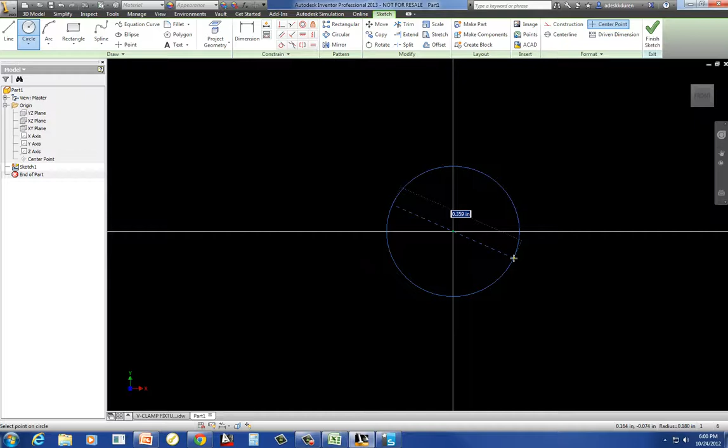I'm going to start out with my center protrusion. It's going to be circular, and it's going to have a diameter of what? 4. Ooh, that's a big one. Alright, and now I'm going to draw a rectangle.

Notice how I didn't project my geometry first, because when you're using a center point, you can go straight to that center point and draw that circular protrusion. But now I need to project my geometry, because now I need to make some things symmetric.

So I'm going to project the first 2 datum planes. Alright, I'm going to make them symmetric. Or do I need the dimensions? I'm going to put a dimension in here because I'm going to retrieve these dimensions. So I'm going to put it in here. It's going to be 1.

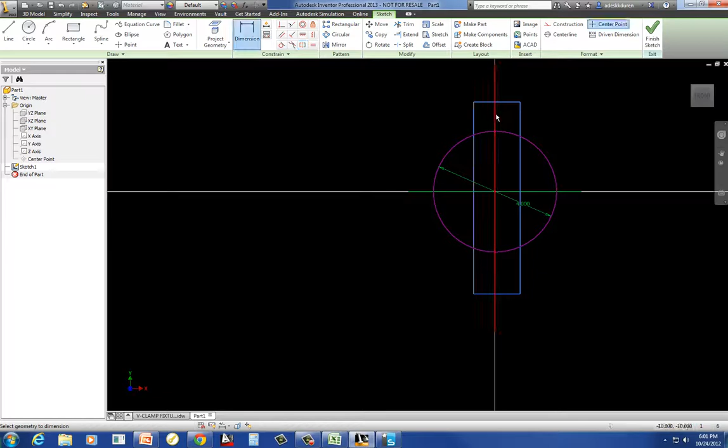So if I'm measuring from the center of this over to one side, measuring from one side to the other side, that's actually locating that. So on your drawing, this would be a 2x, wouldn't it? I'm going to locate this side from the center. I've got to go over here and do this one too. They're 2 different features. So now I'm going to put the overall dimension on here.

5.5. And this will be 2.75. Alright.

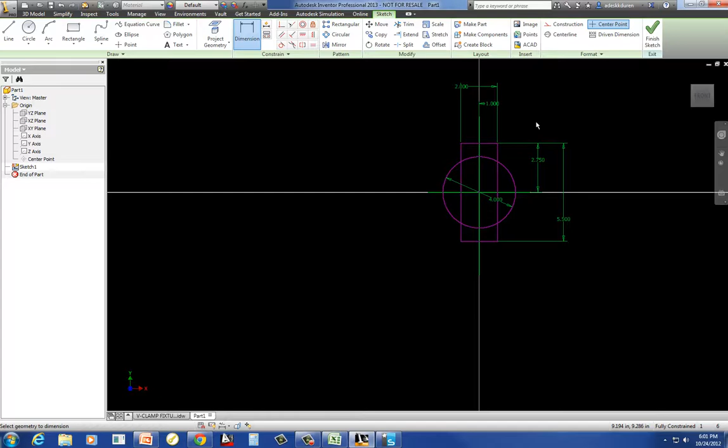Now I'm going to hit E for extrude. I don't know why it zoomed way in on me. That one, this one, and holding control to allow the other one too. And I'll always push my extrusions away from me.

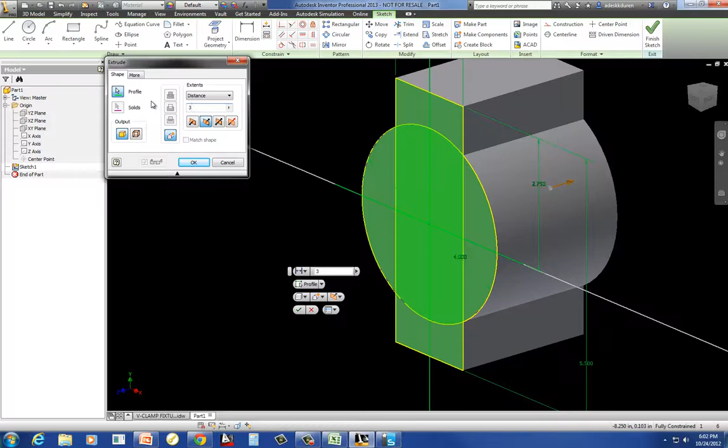Now, is there any reason for this to be symmetrically extruded? No, that hole is not on the center or anything. So let's go the whole 3 inches down. There's my first piece. The next one.

What do you guys want to do next? You're going to put that hole in there? We would need a hole for a circular pattern. So I would highly recommend a hole next.

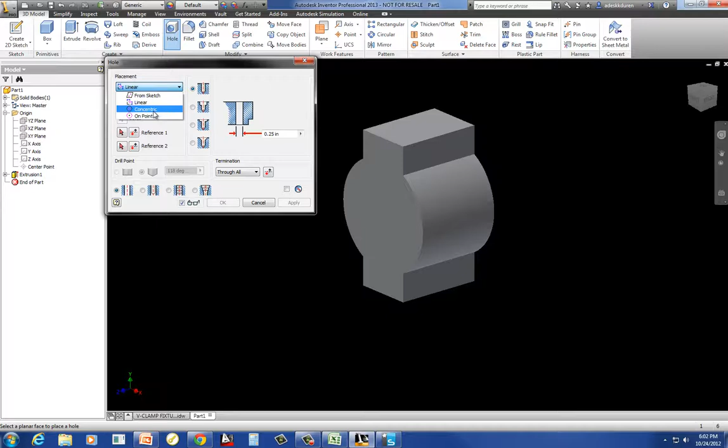Let's make a hole. And it's right in the center of this part. So how are we going to locate it? Work with me. Concentric. We're going to drill on this plane, and it's going to be concentric with the cylindrical object.

And now I'm going to make this one a counter bore. Now the difference in this one is the hole actually has a distance. So this one has the pilot hole comes first. It's 0.75 diameter with a depth of 1.63, and that is from the top of plane. And then we've got a counter bore of 1.25 with a depth of 0.25.

The only reason that, in drawings you always have the pilot hole first, and the way that I like to explain that is that there are combination bits. There are actually countersink bits and counter bore bits that you can use. So if you use the countersink combination bit, it's going to have that 82-degree flange on it at some point.

So when I come down, it's going to drill that first pilot hole, and that enables both holes to be centered as well, perfectly centered. So that's the reason that I tell people that may be one way for them to understand that.

Now, is this hole supposed to be flat? Does it tell us? So there are some holes that will have, it would be like an end mill. It will not have this pointed tip of 118 degrees.

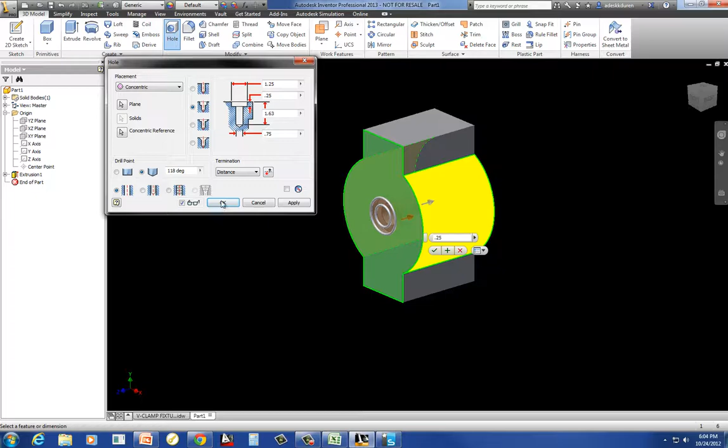And say okay, and now I'm going to make a sketch on this one, projecting the first 2 planes. And now I'm going to make 1 point with a bolt circle. So this one, oh, I'm sorry, this is not dimensioned that way.

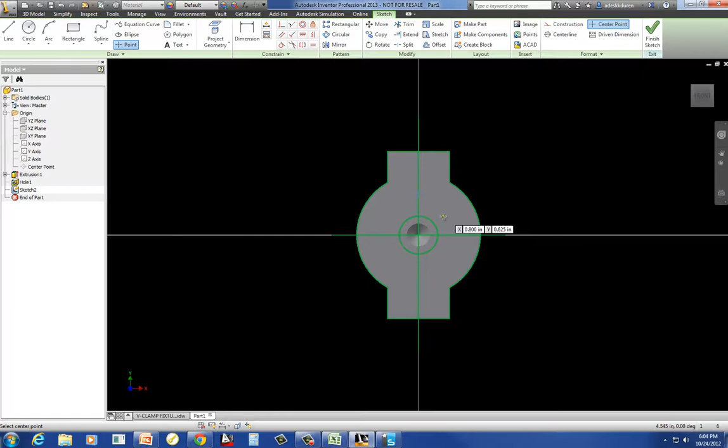So I have that one, and now I've got to dimension these things out, don't I? So it's 0.125 in each direction. So if it's 0.125 in each direction, can I pattern this? Yeah, but I cannot show it as a pattern hole.

Now, I did have some students that were actually modeling in a higher end inventor class, and they were just patterning holes that were not equidistant to each side, so you really want to watch that. These are equidistant, just like the round off, it was 0.875 all the way across and 0.438 to one side. So that was not equidistant.

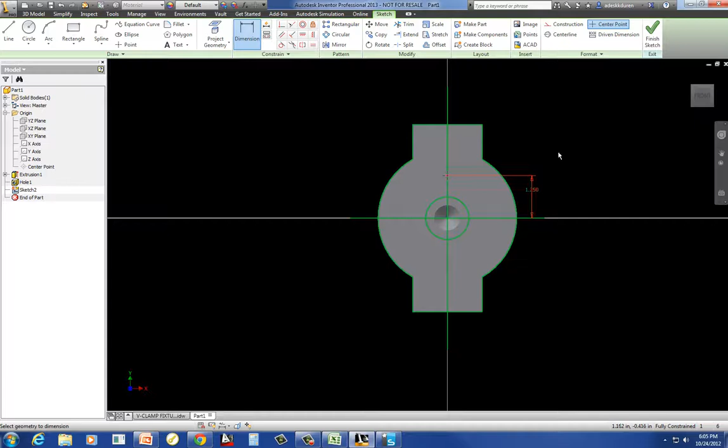I'm going to finish that out. I'm going to make a hole, which is H, the alias H. We're going to use a tapped hole here. That is a simple hole.

When I come down here to this tap, I'm going to select on size. Anything over a quarter inch, or starting at a quarter inch, gets something other than a number. So it's half, 13 UNC, and 2B. What does 2B mean? Inside a normal class of fit. B means inside.

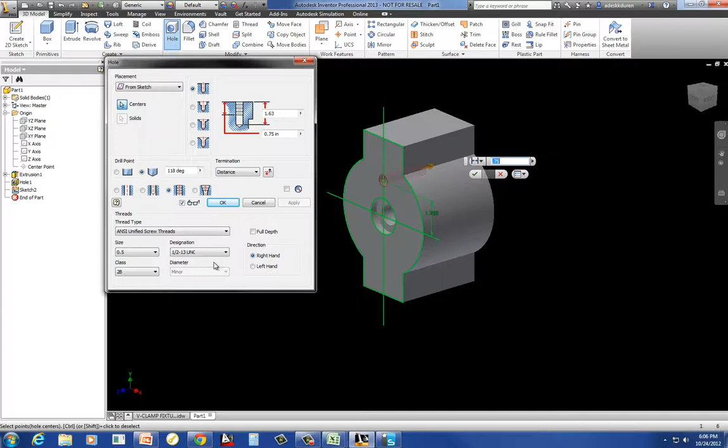A is external thread. Alright, and we're going to make this full depth of thread. And now can I pattern this one?

Sure. Should we make it a rectangular pattern? If we made it a rectangular pattern, it's going to want to go in rows and columns, and we would have to actually rotate one of those patterns in a circular pattern. You want me to show you that?

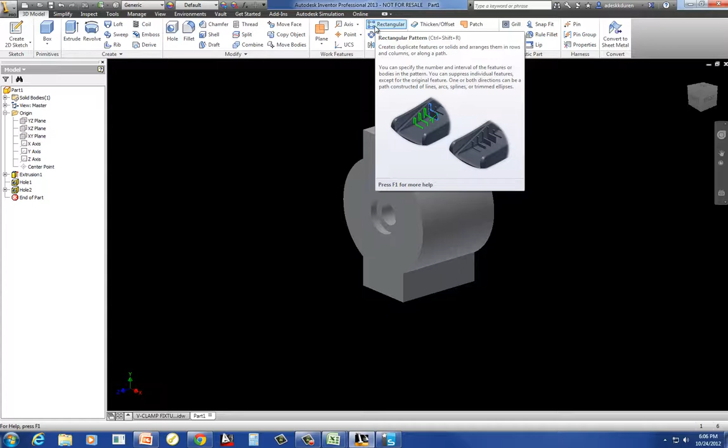So here's the difference. I could say this feature in this direction, I'm going to come down, I'm going to flip the direction, and it's going to be 1.25 times 2, right? But where's my second direction? I cannot make this come over here and come down in my start.

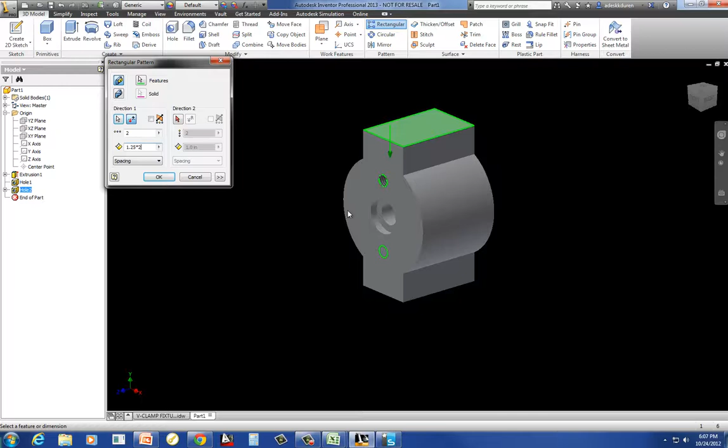I could say that the second one could be over here, but I couldn't get another one over there. So I could use this, and do this in a circular pattern around this axis — it's convoluted. And I could say I want 4 in 360 degrees. So that's how you would get to that.

Alright, circular pattern. Yes, 4 in 360 degrees. And say okay. So that makes them all 1.25 apart.

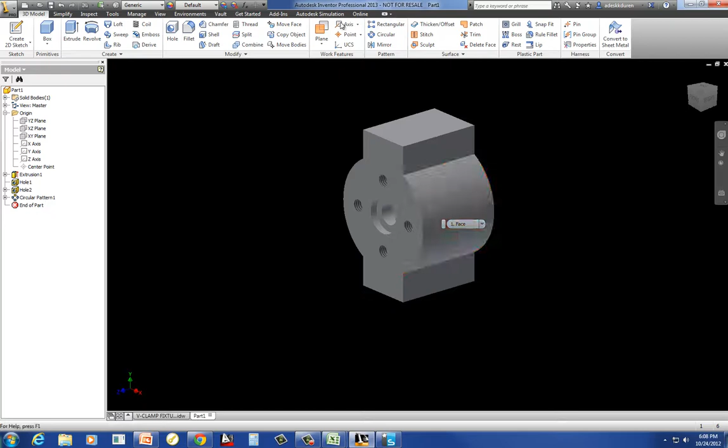Okay, pardon me, I need to make a hole on the side of this part. How am I going to do it? I don't have a plane. So I'm going to have a plane that's either offset, or I could use a plane that's tangent to the surface, parallel to a plane. Wow, okay, look at that.

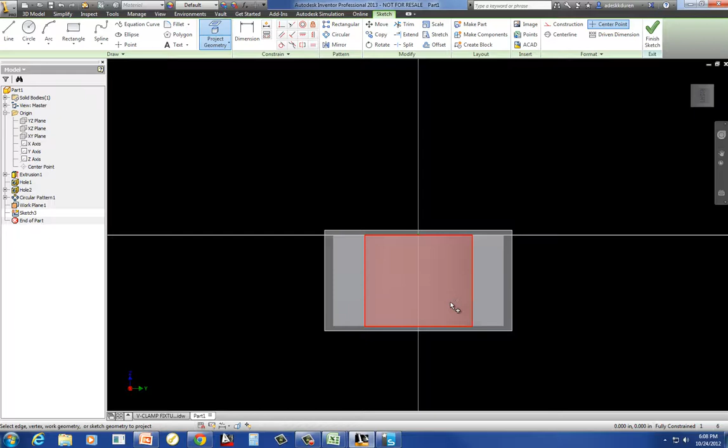Alright, now I'm going to select this and sketch on it. And I'm going to project the geometry of the top of this, where I'm going to dimension from, and probably that other plane that runs right through the middle, because this hole is right in the middle. It doesn't have a side-to-side dimension. So I'm going to put a point right on that one, and I'm going to put a dimension straight down. That one is 1.375.

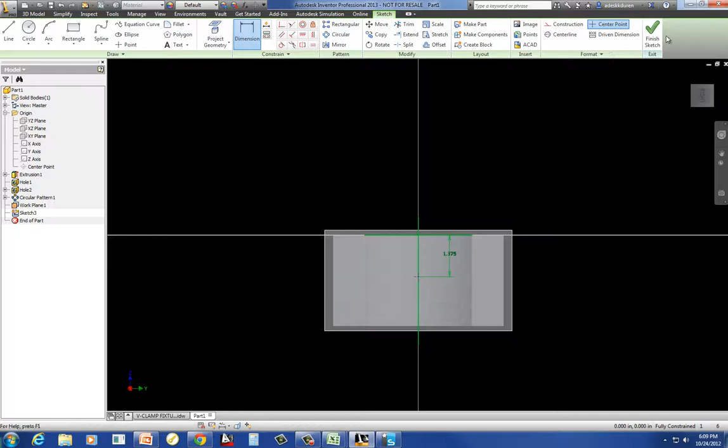I created one. The plane that I selected was — let me finish this — the plane that I selected was tangent to surface and parallel to another plane. So then I selected this.

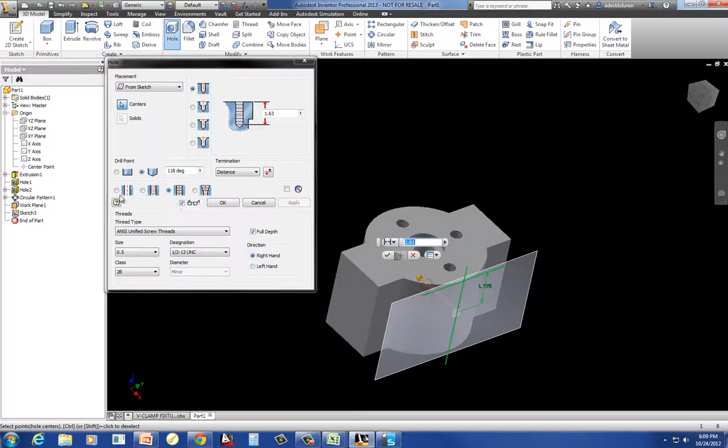Okay, I'm going to put a hole through there. This goes through all, and it's a simple hole, not threaded. And don't forget, this one is a clearance hole, so it actually adds clearance for the size of a screw. So this one is going to be 0.375, and it's going to be through all. And say okay.

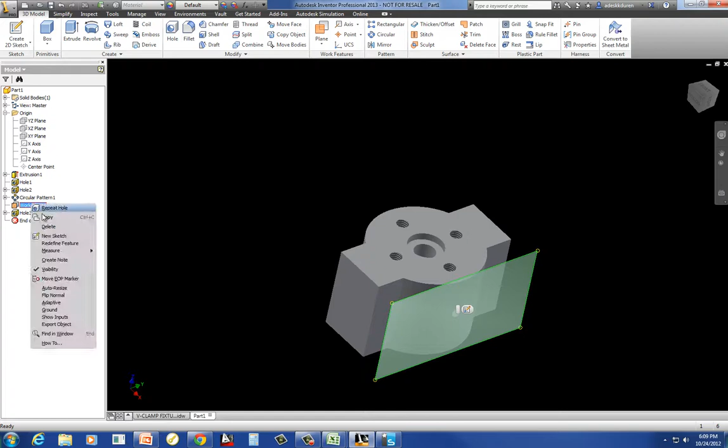Okay, whenever you make a work feature, turn it off. Because when you get into an assembly, you're going to have all your work features and all your shared sketches everywhere.

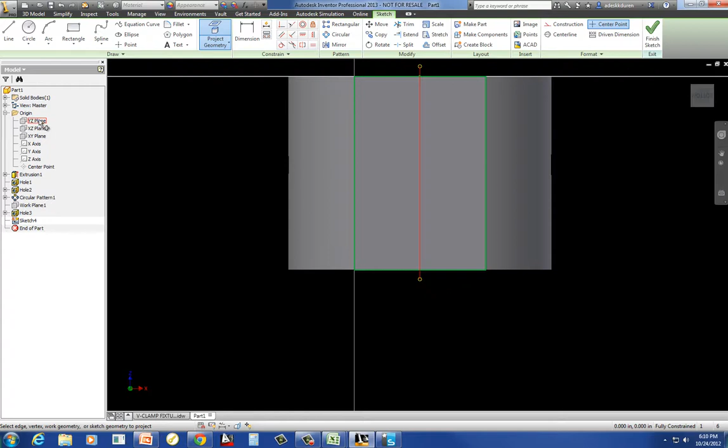The next thing we're going to do is make that — what kind of cut is that? Dovetail, it's a dovetail cut. Alright, have you guys ever seen a dove? Project geometry, and I'm going to make it right in the center. A dove's tail goes kind of like that. They use this for joining furniture a lot.

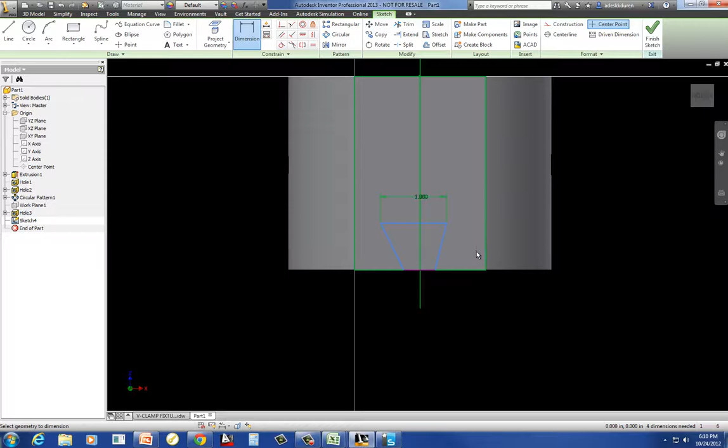Now, anytime you draw down to something that's projected, it's going to think you're finished, so I had to start the drawing again. So I'm going to make this 1 inch here, and my angles are 2 times 60 degrees. And it's not telling me this — oh, it is, it's telling me how far it is.

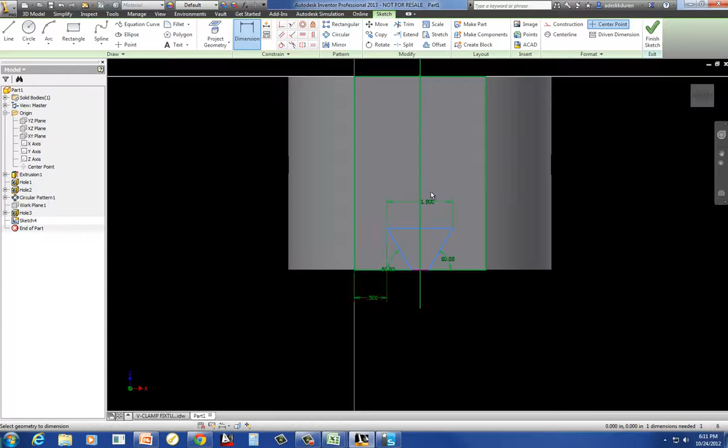0.5 offset. So from the bottom or from the top? It's from this top piece, isn't it? 0.5, there we go. And now I'm going to extrude that. Select just that piece, it's going to be a cut, and I'm going to make it through all. Okay.

It did? 0.5 high, oh man. Well, I should have known that because it didn't turn purple. Thank you — 0.5 high.

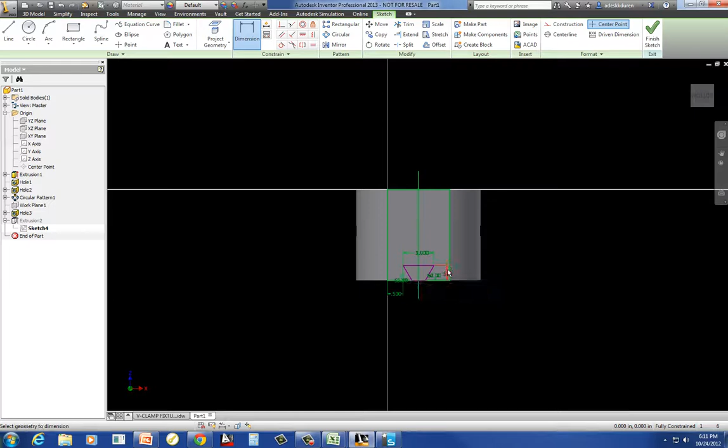The last thing we have are some fillets. It doesn't say how many, but I'm going to tell you that they're all on interior and exterior corners, 0.125 or 0.13, it's just rounding. This one, this one, this one - you can reach through the part. So we should have 8 of them.

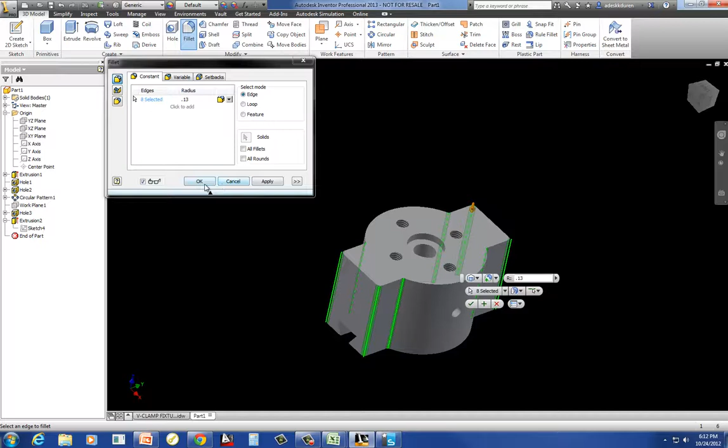Usually you're not going to round the edges of the faces of two parts that are going to fit together. Most of the time when you make a seal, you're going to try and leave that as flat as you can.

I'm going to go to Tools and Materials. Did you guys see that there's an Inventor material library? Did you see the Autodesk material library? It's huge. Let's go look at it.

Look at all the different grades of cast iron. Different plastics. There's a plywood in there - it's because I put it in there. For my last part, it tries to keep it in my style manager. Look at all the different aluminums. This is much more in depth than what we have in just the Inventor one. And this is aluminum 6061.

Okay, gave me a little shine. So I'm going to save that part as bearing base.

Do you notice anything about the bearing base and the bearing top? The center lines - I got the same center line. Notice anything about the shapes?

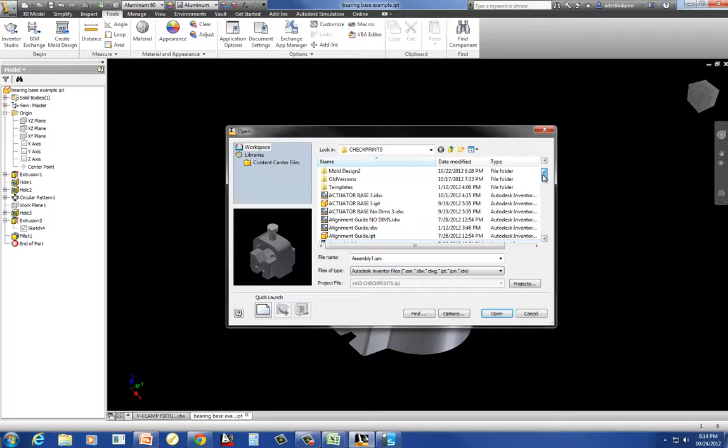What do you think about the shapes of them? They look kind of the same. Bolt pattern, yeah, the hole pattern's definitely the same, right? Okay.

Let me show you a trick. File, save as. Bearing top. Now I'm in bearing top.

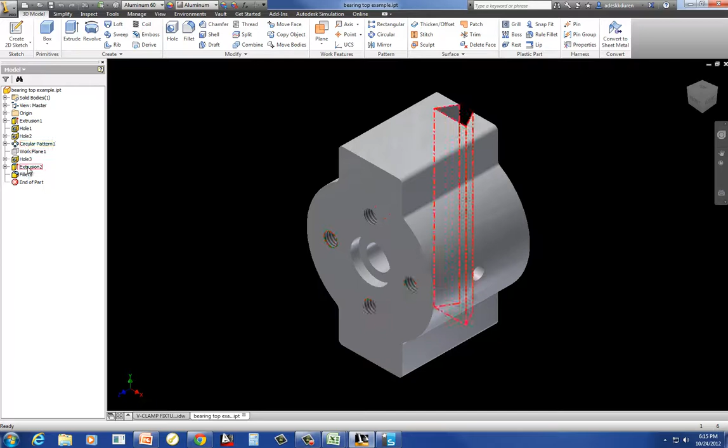Alright, I'm going to delete this cut. Don't have that on there. And the sketch - don't need that. Don't have this hole on the side, right? And I don't need that work plane.

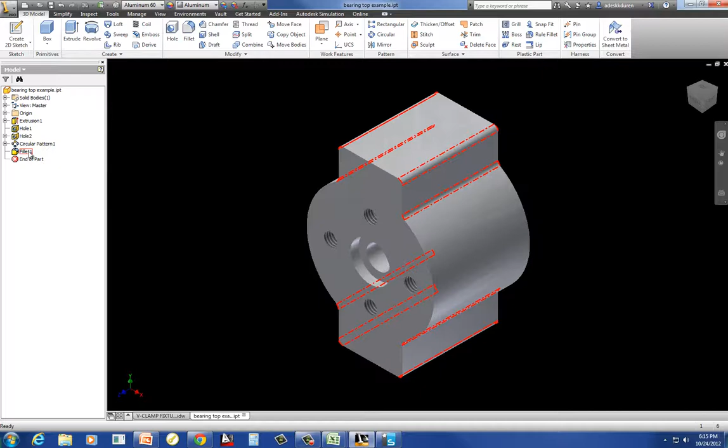My job just got real easy. You think? My circular hole pattern's the same, but it's a different kind of hole. I got all those fillets on there too.

But I'm going to show you guys something a little bit different now. I'm going to grab the end of part, and pull the end of part up right after the first feature, which is the extrusion. If I go to edit this feature, I see that the shape is exactly the same, but the depth is not. So all I'm going to do is change the depth from 3 to 2.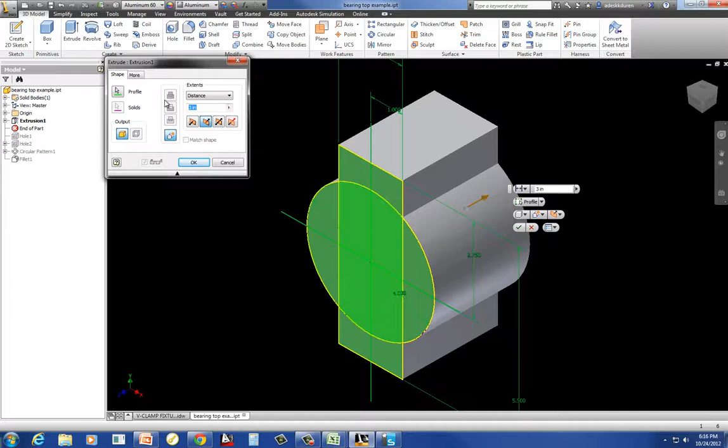And then I'm going to resume the center hole. Center hole is not the same, so I'm going to right click and edit that feature. I'm going to make this a simple hole that's 3/4 inch, and it goes all the way through the part. Getting faster?

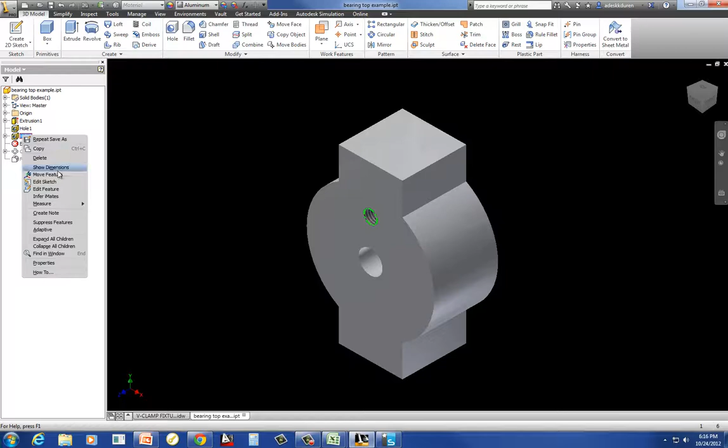Let's resume the next hole. That one is also not the same, so I can edit this feature. Oh, I don't want to move feature - edit feature.

And I'm going to change this to a counterbore. And I'm going to follow the directions there. And it's not going to be threaded. So I'm going to start out with my pilot hole. My pilot hole is the smallest, it's 0.56.

It has a depth of 2. Very good. Isn't that all the way through the part though? Well, what the heck, why don't we just say through all? Right?

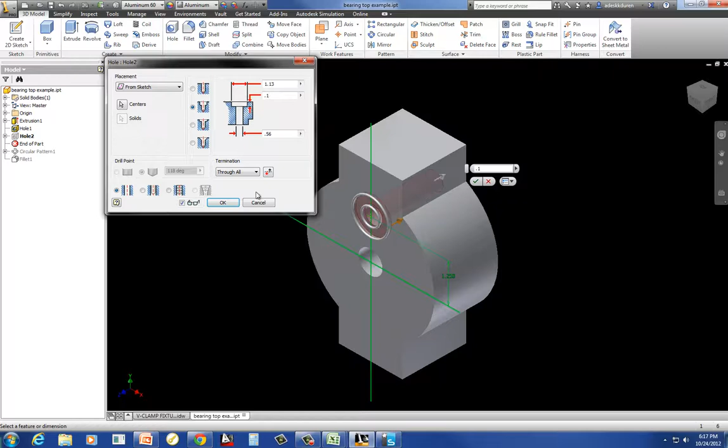Okay, I'm going to do that, and then I'm going to go to - it has no counterbore symbol, but I guess it is one, 1.13. And it has a depth of 0.1. And say OK. And now I'm just going to drag the end of the part down to the next one. And there's my circular pattern.

Now there's something else that I'm going to do. I got to put that chamfer in there. That chamfer is a little bit different than just a regular 45-degree chamfer, right? It's 1.1 from the bottom and it's 30 degrees. So this is a little bit different.

I'm going to use the chamfer command. And I'm going to come over here and look and see what I've got. I've got distance and an angle. I've got distance and distance. I need distance and an angle.

So what it wants to know is, what face are you going to be taking away? I'm going to select from this one because I'm actually going to be measuring on that face. The edges - it wants to know what edge you're going to be measuring from. What it's showing me here is select the face, and it wants to know what edge. Am I making this a chamfer or this a chamfer? That one. So what is the distance from here down is what it's asking me.

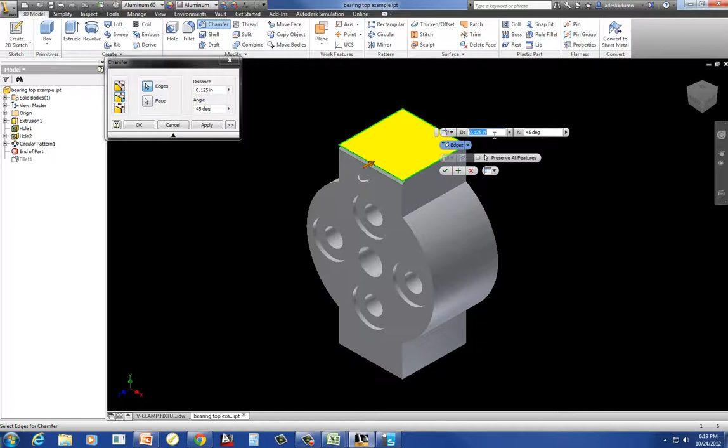It's not 1.1. 2 minus 1.1 - I'll put that in there, right? And it kind of previews me, it kind of shows me this is what you're doing. This is kind of what it's looking like. Is that looking right?

No, let's go back. And we go back to my face. I want to select off this face, and my edge to be this one.

Now in this distance, it's doing another distance. Is that weird? Huh?

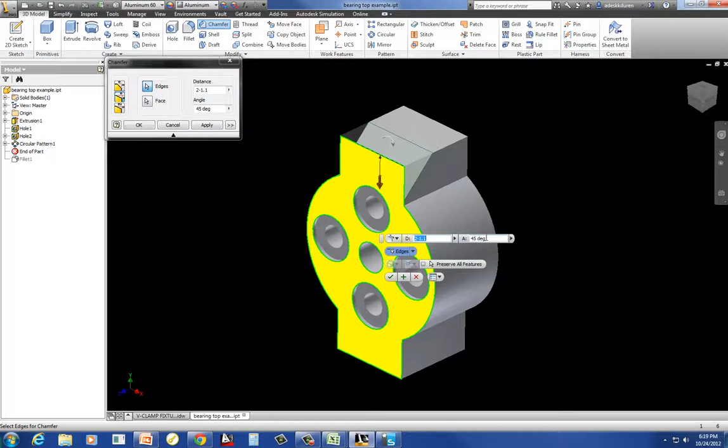That's right. So let's go back to what we had before. We selected this face, taking this edge away, and we said that that was 2 minus 1.1, but we need to change this to 30 degrees.

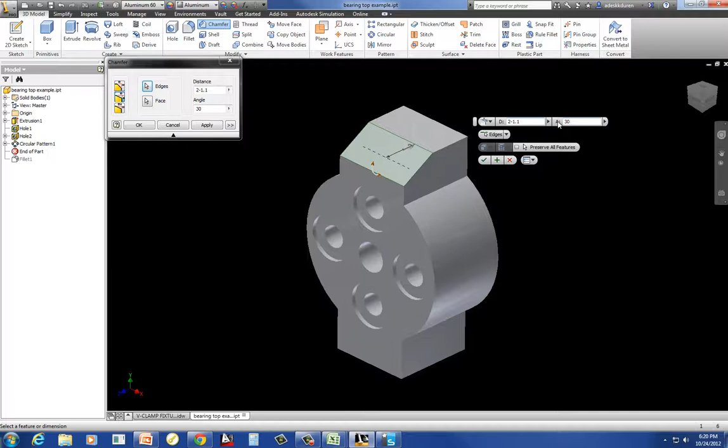Does that look better? We should have put everything in before we went back and changed our face. Does that make sense? So in software, you're going to have to find out what it wants from you, what it's doing, and this is kind of what Mike was saying. You kind of want to play with it and see what the software is doing to figure out which face you want to select, what edge you want to select, what it's trying to dimension from, because sometimes it's not intuitive.

So let's cancel this, let's start this again. We're going to have a chamfer. It's going to remove area from this face, and it's going to be measured from this face. The edge that's going to be taken away is this one. The distance here from this edge down is 2 minus 1.1, and the angle is 30 degrees.

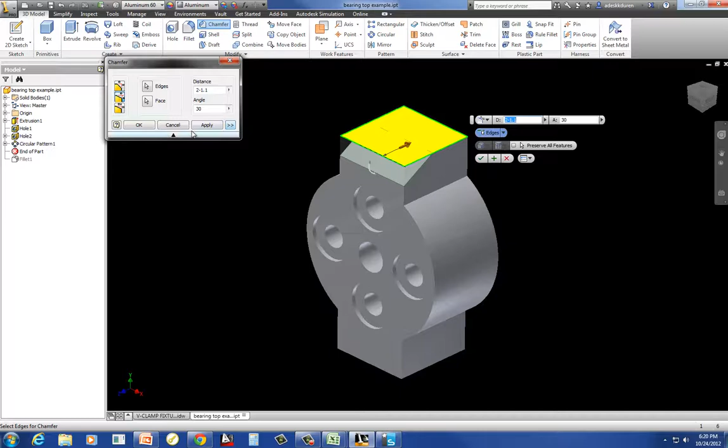Okay. Now, can I have 2 of these? Can't. I have to apply it, and I have to do it again. But the thing is, it saves all my settings.

So I'm going to select this face and this edge. It gave me 1.1 and 30 degrees again. Is that the wrong face? I did select the wrong face. So let's select this one and this edge, 30 degrees. Looks right again. We'll say OK.

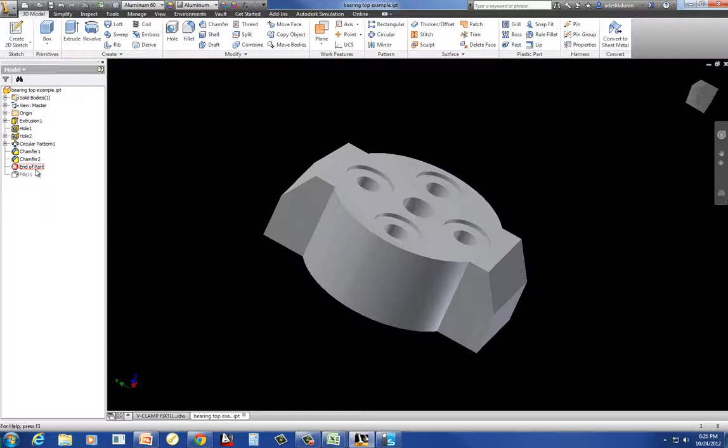Alright, now I'm going to review my fillets. My fillets are everywhere that I needed except for a couple places. So we're knocking all the corners down. All I have to do is edit this feature and add this one and this one. On the side too, that's right. This one and this one.

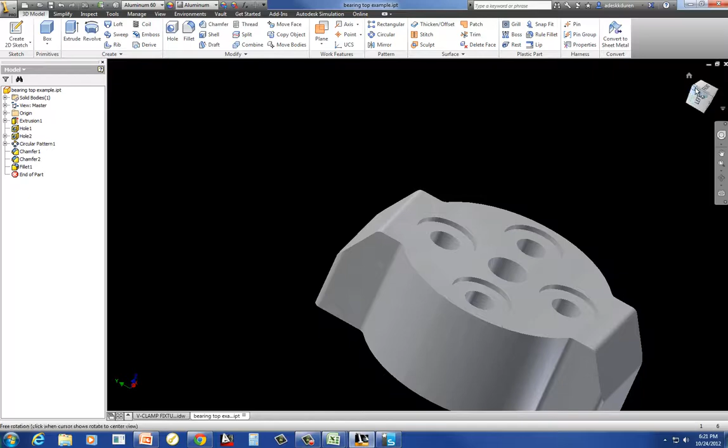Now, something that happens, I want to show you guys. I'm going to do this in one feature like this, because whenever you have a fillet, it runs like a train on a track. If it hits a corner, it's going to stop. So in a lot of softwares, you're going to run everything in one direction. I'm going to put all my rounds in one direction.

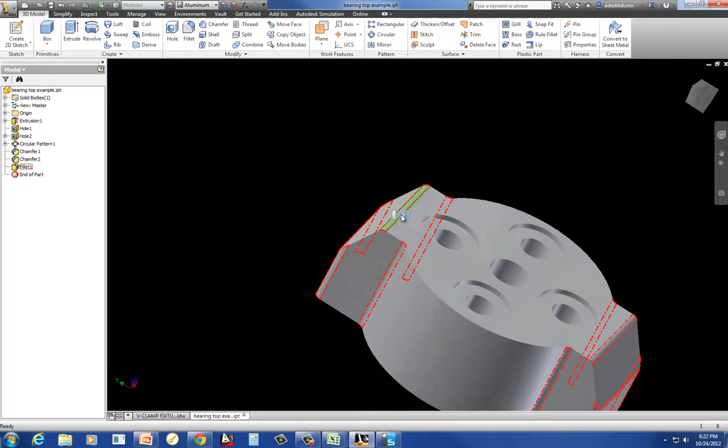Watch this. I'm going to go back to this one, and I'm going to edit that feature. I'm going to take this one out. I'm going to take these vertical ones out. I've got almost all horizontal ones here right now. And watch how it smooths everything out when I do this.

If I've got them in 2 directions, but they're not intersecting, see how these are running vertically, these are horizontally, but they're not intersecting. I'm going to say OK.

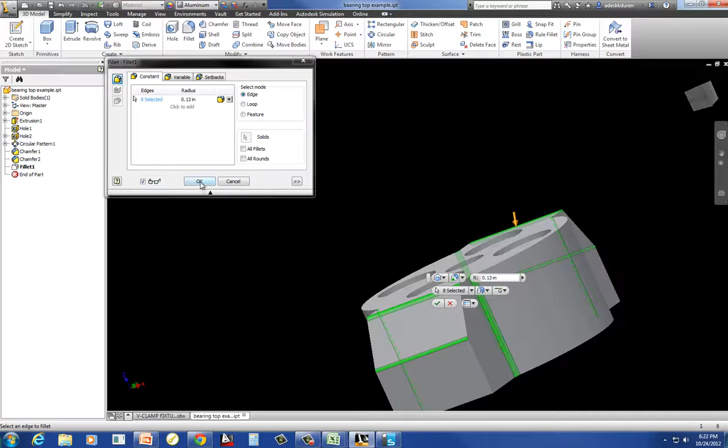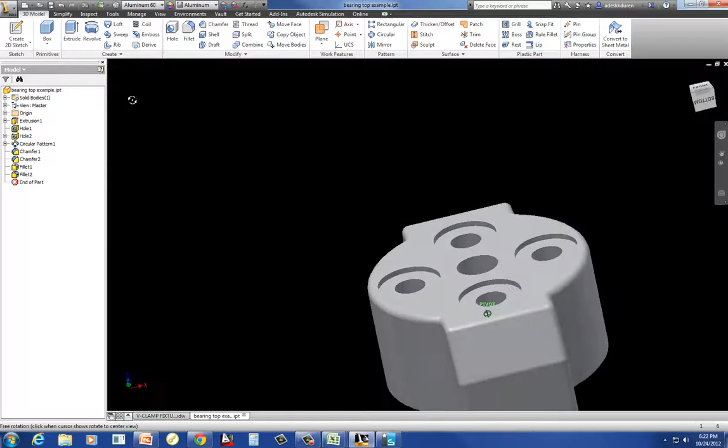Now if I make another fillet, it goes all the way around the part, because in those horizontal edges, I've created tangent edges, and these have created tangent edges all the way around the part. So now all I have to do is select those 2 edges, and it made a much, much cleaner fillet surface for me. You see what I mean?

It doesn't want to be a fillet? Dang, it sure doesn't. Alright.

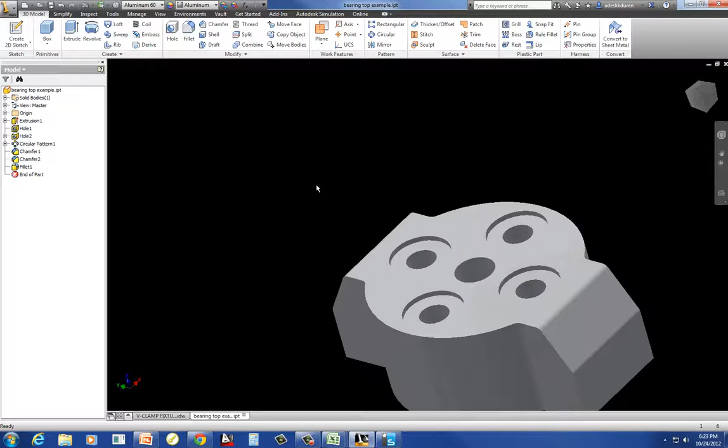It could be, but there are two faces that are being sealed together, and usually you don't put a fillet on that. So I'm going to edit this feature, and I'm going to put it on only these surfaces. Just let it be ugly. You also have to take it off the one that's touching the front surface also.

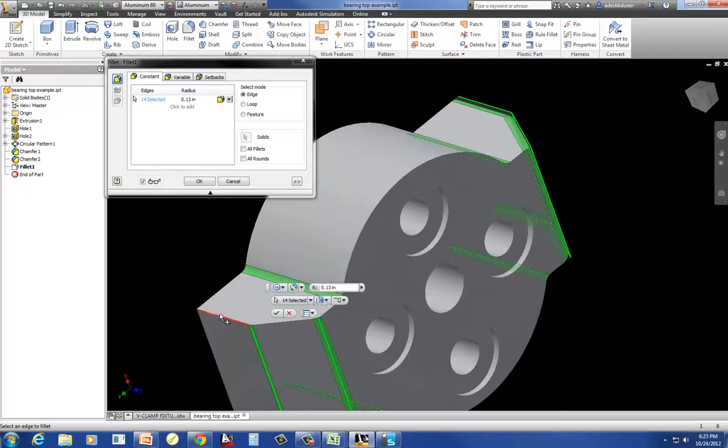Yeah, the one on top. This one? No, the one on the corner facing the... this one. Yeah. And the other one on the other side. Alright, there we have it.

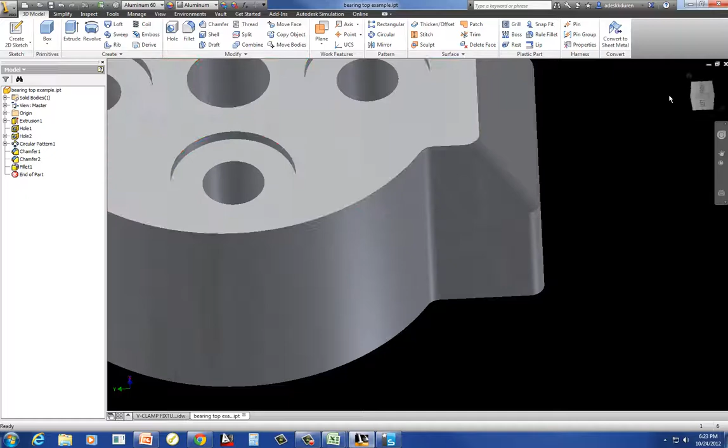So I want to show you guys this. Okay, let's say OK on that. I want you to look at this. Now this may not be a big deal to you guys, but when you get into industrial design, you don't want little snippets like that. Do you see? I can actually see that surface, how it's different. You see it? I would have put these in and then wrapped that. But if you had this rounded, yeah, it would have kept on running, but it would just wrap those 2 edges.

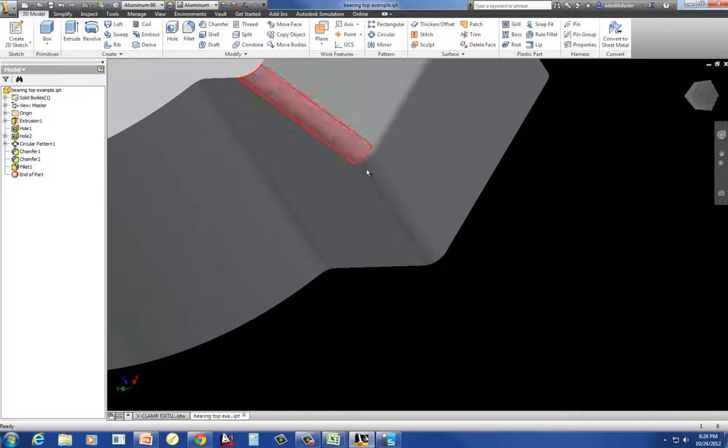Okay, so I've got this part made. Is it made out of 6061 aluminum too? Yep. Sweet. Save.